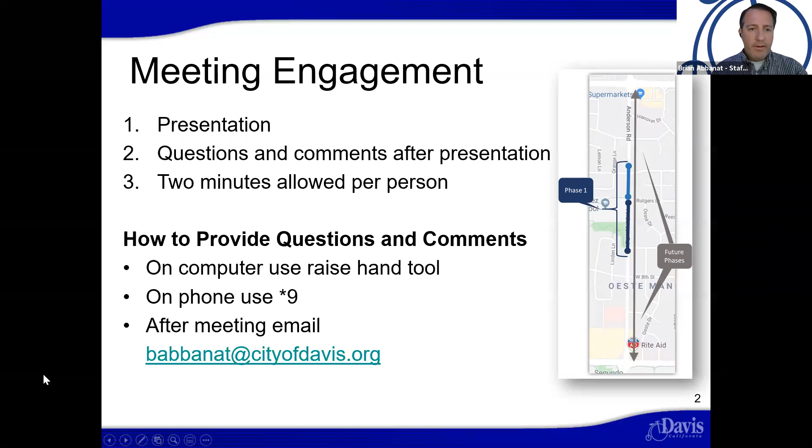Not showing up on my end. Okay, it's advanced, it's just there's a little delay it looks like. There you go, all right.

So Jennifer gave the broad framework for the evening, and I'm going to share with you the actual content of our presentation and how it's organized.

I'll first give an introduction and some background information for those who may not have been able to participate in the first recorded workshop and who might just be learning about this project now.

We will then transition into the feedback we heard from the recorded workshop, and also the survey that accompanied that, and what those survey results were telling us.

Adrian will then share with you the design concept that we're looking toward making on the corridor. After that, we'll move into what the next steps in the process are and what the timing of this project might look like.

And then finally, we will have an opportunity for public comments with questions and answers. So Adrian, next slide.

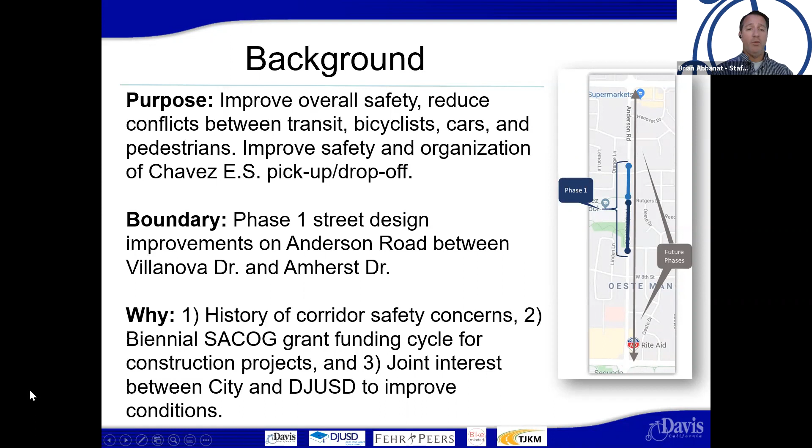The importance of this grant funding is that it leverages $9 in federal funds for every $1 we contribute at the local level. So it really is important to take advantage of these funding sources when we have the opportunity, in projects that can compete well.

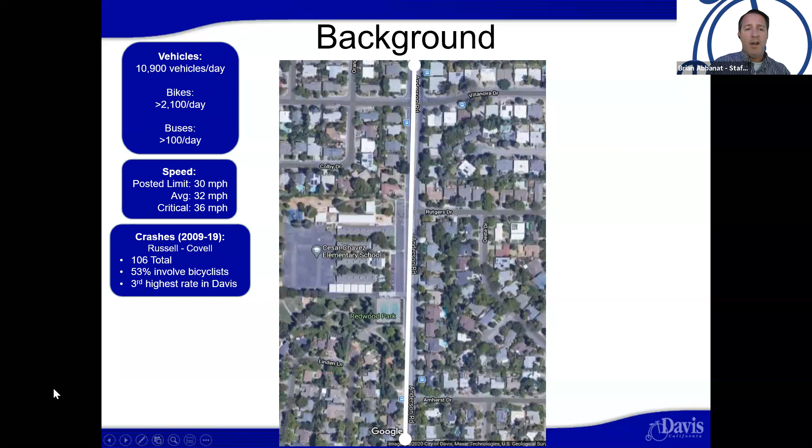We'd like to do that with this project. The 10-year crash history indicates over 100 crashes. Many occur at Covell and Russell, but there's a proportional number of crashes on the interior of Anderson Road as well, between those two intersections. 53% of those crashes involve bicyclists, and this corridor has the third highest rate of collisions in the city. So lots of challenges we're trying to deal with, and hopefully we can make progress with this project.

I was going to look a little closer at the specific project area we're looking at here. There's a hot spot at Villanova Drive where there are quite a few crashes that have occurred, disproportionate to the travel volumes we see on that street or at that intersection. We also have the Rutgers intersection, which is a well-known concern from both Chavez parents and caretakers of their students, as well as neighborhood residents. And the school frontage pickup and drop-off area on the west side is a problem area we want to improve.

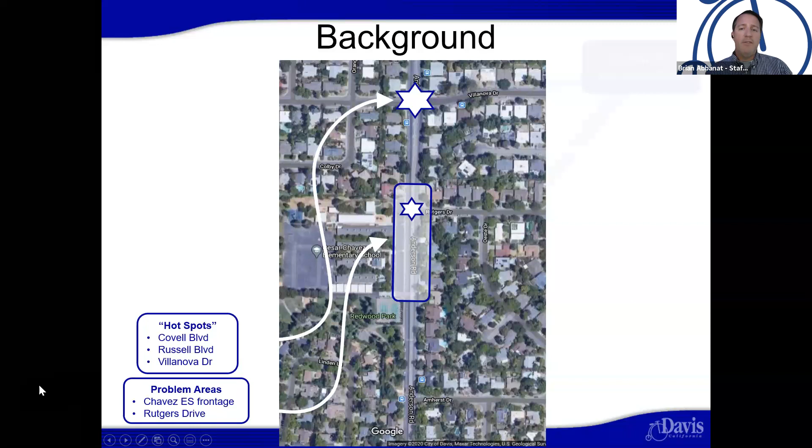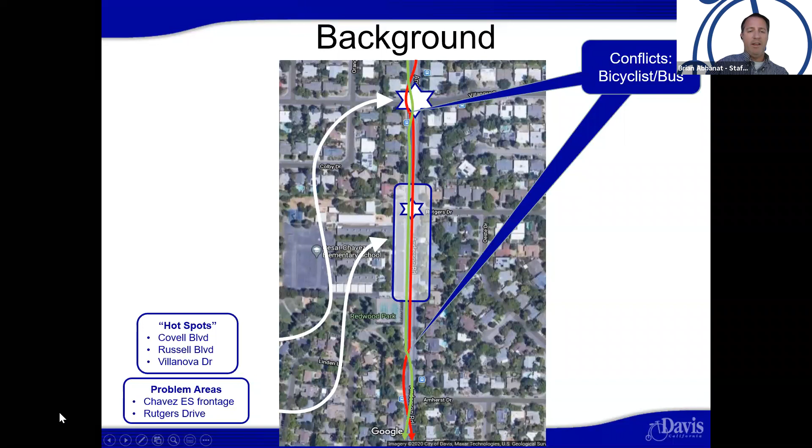Just beyond those hot spots, but also within the project area, we have conflicts between bicycles and buses. The red line represents buses and the green line represents bicyclists. Here we have buses pulling over to pick up or drop off passengers right on the curb in the southbound direction. They have to cross the bike lane to do that, and that occurs again at the southern end of the project area along the entire corridor between Covell and Russell Boulevard. This happens 5 times. Typically, during peak times you have this leapfrogging between bicyclists and buses, and we'd like to better organize that so it's more comfortable for all users, including buses and bicyclists, as well as improving their safety.

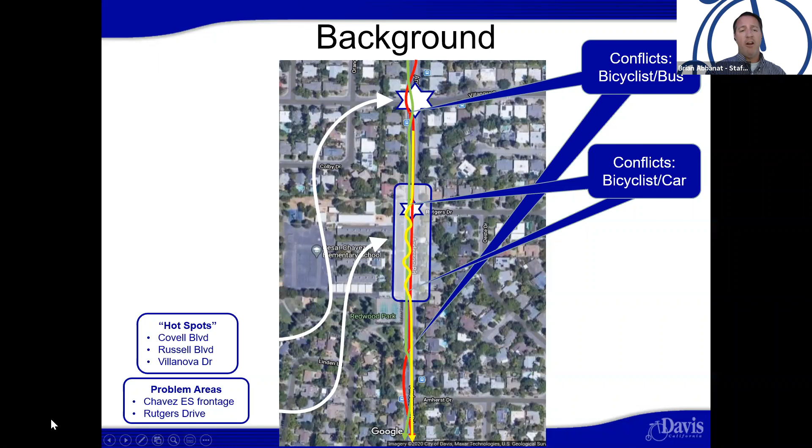And then we have conflicts between cars and bicycles. They're doing the same thing on the frontage of Cesar Chavez, where you have cars pulling in and out and needing to cross over and back from the bike lane in order to do that. These are conflicts that ideally we can correct so the whole project area is better organized and functioning more safely for all users.

Adrian, next slide. Not slide, but just advance.

There are other risk factors that contribute to the complaints and challenges we're seeing on Anderson Road. It's a wide street, travel lanes are wide, and these encourage the higher speeds we referenced earlier that we'd like to see reduced. They also create long crossing distances for pedestrians or bicyclists wanting to cross Anderson Road, which also impacts the amount of red time cars have to wait for people to cross the street. Wide intersection corner turning radii, as they are today, encourage higher vehicle speeds when making right-hand turns into and out of the cross streets. And we know higher speeds are correlated with higher injury and fatality rates - the faster cars are traveling when they collide with a non-vehicular user.

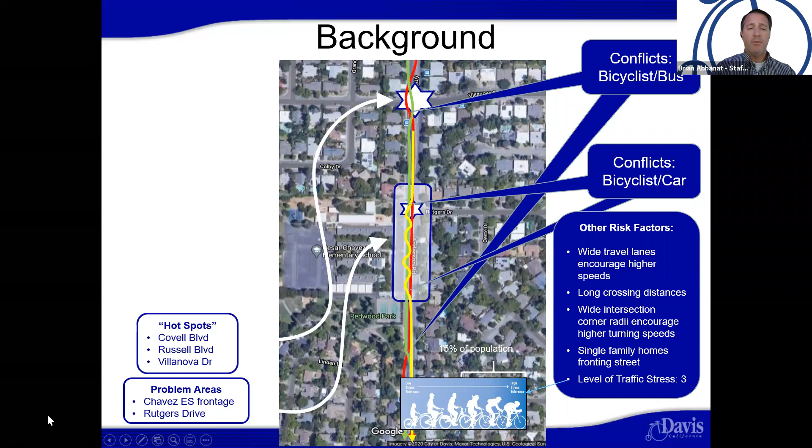I mentioned earlier, single-family homes front the street. They need to be able to pull in and out of their driveway with a level of safety in doing that. There's also a metric for bicycling called level of traffic stress, with 1 being the most comfortable conditions and 4 being the worst, most uncomfortable. Anderson Road is about a level of traffic stress 3, which is only suitable for approximately 15% of the population. We'd really like to make this street more accessible to a broader range of bicycle user types and abilities.

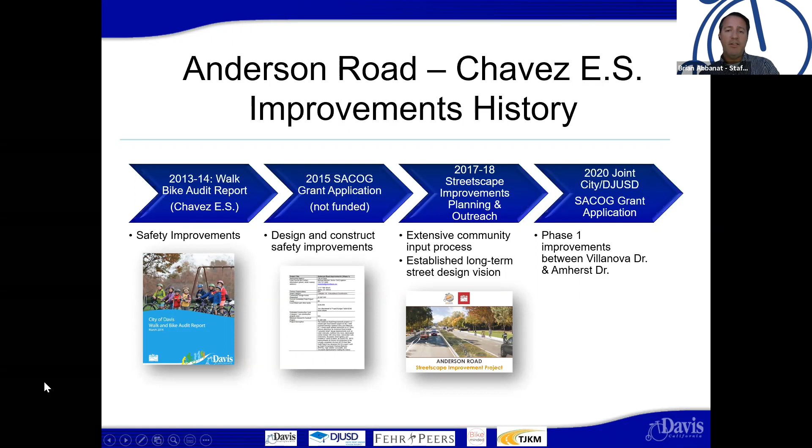There's been a lot of studies and planning efforts for Anderson Road over history. Looking back the last 7 or 8 years, our Safe Routes to School program completed a walk-bike audit report for all of our elementary schools, including Chavez. The output of that study was recommended safety improvements for walking and bicycling to school near Chavez Elementary School. We then took those recommendations and applied for grant funding to design and construct them back in 2015. That project wasn't funded, so we went back to our city council and asked for funding to do a more comprehensive planning and outreach process, which was completed in 2018 and resulted in establishing a long-term street design vision for the corridor. We're building off that vision toward a potential first phase construction project, which is what we're trying to share with you this evening for grant funding. So that's the recent history on Anderson Road from a planning and studying standpoint. Adrian, next slide.

I mentioned at the beginning that we had a recorded workshop back in late July, early August, and a survey. What we heard from the survey results from that first workshop was that about two-thirds of respondents felt it was either very or extremely important to improve safety on Anderson Road, which was a good sign that we'd picked a corridor with a real need. There was also interest in making sure we don't worsen traffic congestion on the street, and to maintain or improve operations along the street. Also, to limit the number of raised buffered islands at intersections to the extent we can, particularly at Rutgers and Villanova Drive. We took that into consideration.

We know that maintaining or expanding school-related parking is an important piece of this project, both to make sure the school isn't negatively impacted by reduced parking supply, and that potential parking impacts don't spill into the adjacent neighborhood. It was important to improve walking and bicycling access to the school to reduce demand for driving. We know some folks whose children attend Chavez don't walk or bike to school because they don't feel comfortable or safe doing that, so we want to improve on that. Finally, over half of respondents shared that they felt the project was headed in the right direction. This is generally a good sign, because with projects like this, we typically get a third who say it's headed in the right direction, a third who say it's not, and a third who aren't sure. So based on that response, we do feel like we're moving in the right direction.

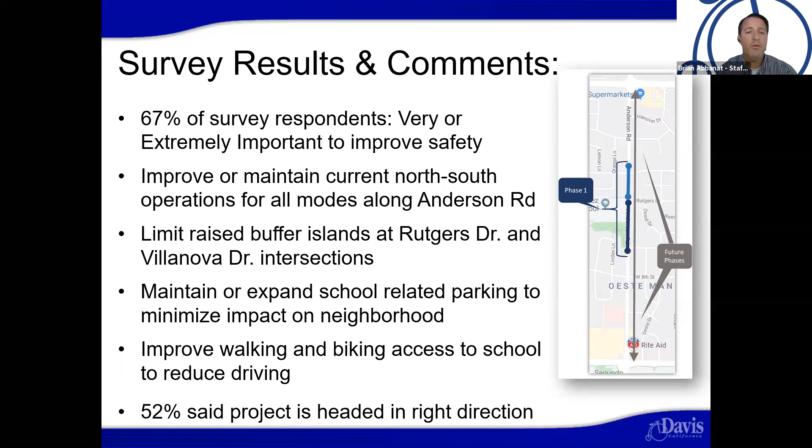Of course, we look to hear from folks on this webinar as well at the conclusion, and solicit your thoughts. So I'm going to turn it over to Adrian, who's going to share some of the design features we're currently exploring, to help you better understand and visualize what that looks like and how they can affect traffic circulation as well. So Adrian, go ahead. Great, thanks, Brian.

What we've completed is a very high-level conceptual design of the improvements along Anderson Road, basically from just north of Villanova Drive to the south end of the school and the park. With this, we're showing new lane configurations and some intersection modifications, but really at a conceptual planning level. There will be design details worked out when the final design happens, so take that to heart as we look at some of these details.

A few points first on the north end of the project. It's consistent with both designs, concept 1 and 2. There are three main things we've been trying to accomplish with these improvements at the north end. The first is that currently Anderson Road drops from 4 lanes down to 2 just south of Villanova Drive today.

There's a lot of merge and issues just north of the school frontage, which we think contributes to some of the collision history we see at Villanova Drive. So as part of the project, we're proposing to move the existing lane merge that happens just south of Villanova to just south of Radcliffe to the north, lengthening that distance so the lane merge happens further away from the school and simplifying the intersection quite a bit.

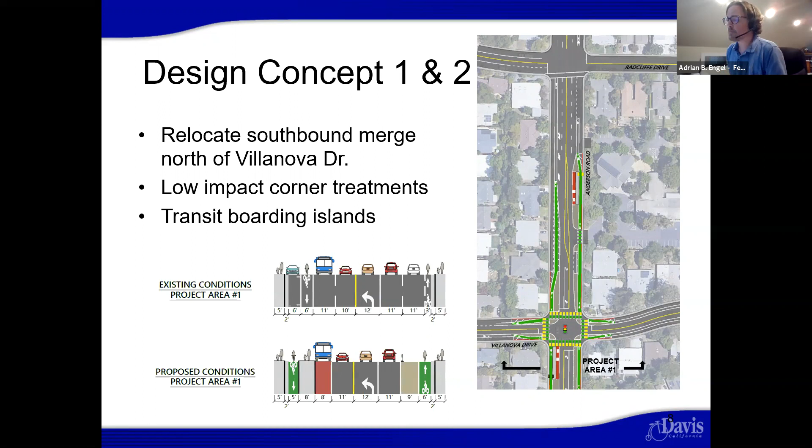As we move further south along the corridor, the two concepts diverge, and we have two different options we're presenting at the meeting tonight. The first option, concept number one, looks at maintaining the current operations for school pickup and drop off, utilizing the western curb on Anderson Road.

The difference here is we're proposing to create a separated bikeway, a class 4 facility that moves the bikeway closer to the curb instead of the typical class 2 bike lane floating between the parking and the traveled way. This removes a lot of the conflicts where cars are pulling in and out of that loading zone and conflicting with bicycles today. I have some videos of operations analysis we've done that highlight that conflict.

With this option, there is a remaining conflict that is not mitigated: as kids and parents get out of cars to reach the school frontage, they have to walk across the bikeway, so there is some caution needed there. Everybody needs to have their heads up, and bikes need to be cognizant of the presence of pedestrians in that location.

In addition to the separated bikeway and loading zone treatments, we're also proposing improvements at the Rutgers Drive intersection, with enhanced crossing and a pedestrian refuge to significantly shorten the crossing on the north side of Rutgers, as well as corner radius reductions and potential bulb outs that will help slow turning vehicles on and off Rutgers Drive at this location.

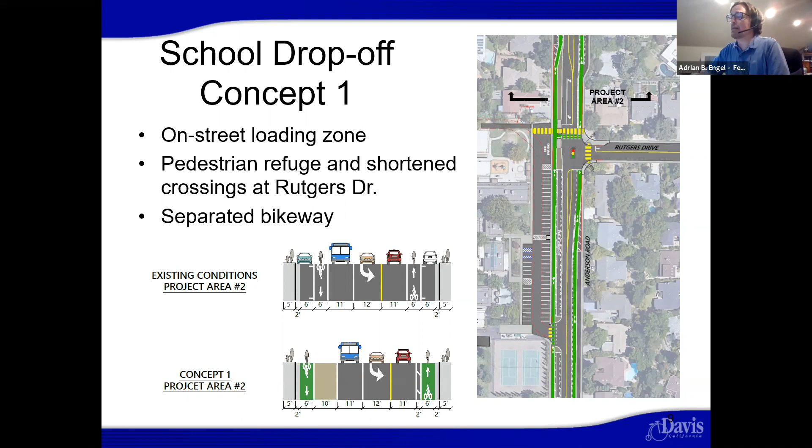At the same location, we've created additional cross sections showing the dimensions of both the traveled lanes and the bikeways. A couple things I'd like to highlight: on the southbound direction, that loading zone has buffers between the bikeway and the parked cars, so there's a door zone for kids and parents opening car doors toward the bikeway.

But we also thought it was important to have that same door zone buffer on the travel side as well, to allow parents or kids to get out on the driver's side just as safely, without worrying about the traffic moving by at that location.

So definitely widening that space, making it easier for people to get in and out of their cars safely. And then also, you'll notice that on the northbound direction, the parking is remaining against the curb in this location, and we're maintaining class 2 bike lanes with a small buffer on the travel side as we can. And this is really to try to preserve as much as possible of the on-street parking where there are existing residents along the corridor. So trying to allow homeowners and guests of those homes to be able to park in front of those homes up against the curb still, with those bike lanes being more traditional, even though we are keeping the width per Davis standards and including a buffer where possible.

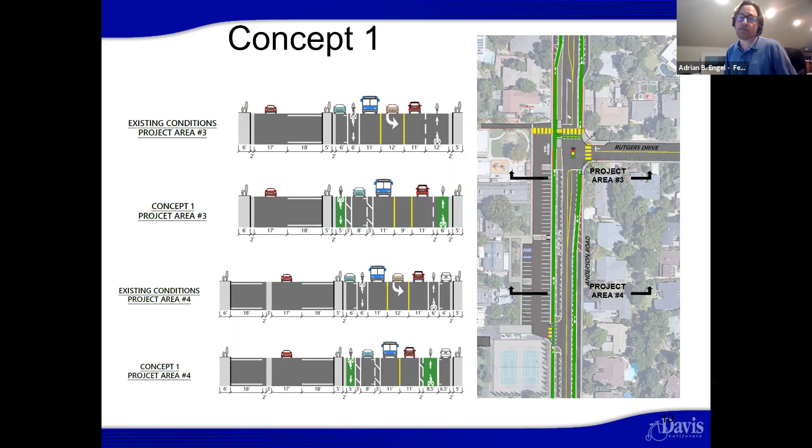The second concept varies the drop-off location significantly from concept number 1. In concept number 2, we're actually creating the pickup drop-off zone on the school campus away from Anderson Road itself. To be able to accomplish that, there's a few things that we've done. First, we've opened up a new west leg of the Rutgers Drive intersection. At that signal now, you'll be able to enter the Chavez School parking lot. The parking lot operations would be southbound only. There'd be staff parking along the curb, along the sidewalk of Anderson, and then the drop-off zone would be right up against the school frontage on the west side of that parking lot area.

And then all of the vehicles would exit the parking lot at the southern driveway to be able to get back onto Anderson Road. The idea is to try to maintain that one-way operation to increase efficiency and make it very easy and safe for the kids to get dropped off at school without impacting a lot of the traffic and bikeway conditions that we see today. With this option, we have maintained the separated bikeway along the school frontage. There would be some sort of neighborhood permit system for staff and teacher parking along this frontage as well, but it would create that protected bikeway along the school frontage with the parked cars there. And in the northbound direction, similar treatments that we saw from concept number 1 with the class 2 buffered bike lane and the on-street parking up against the curb.

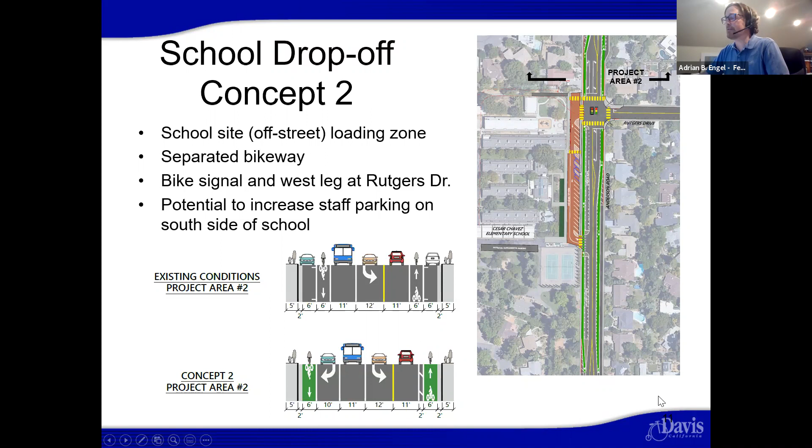Again, here are some cross sections for the area just south of Rutgers. Some highlights for this, you'll notice that there's angled parking within the school frontage area. Again, this is to help maintain the southbound orientation for the parking lot. And you'll also notice that the travel side buffer for the on-street parking along the frontage of the school has gone away as well for a portion of this area, and that's to accommodate that northbound left turn pocket. So slightly different than concept number one there as well.

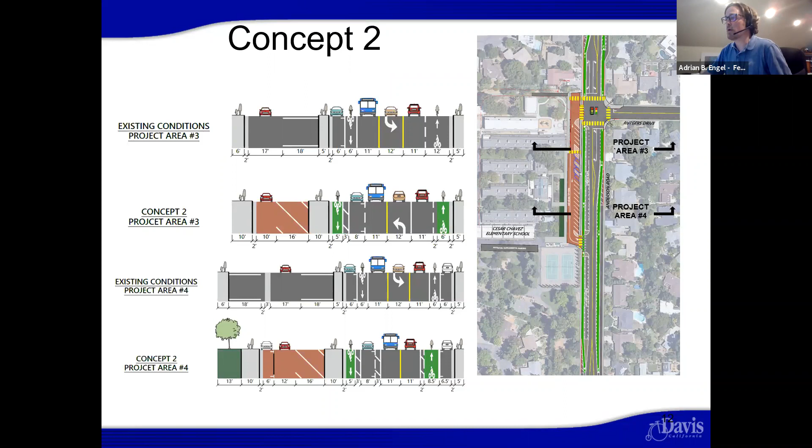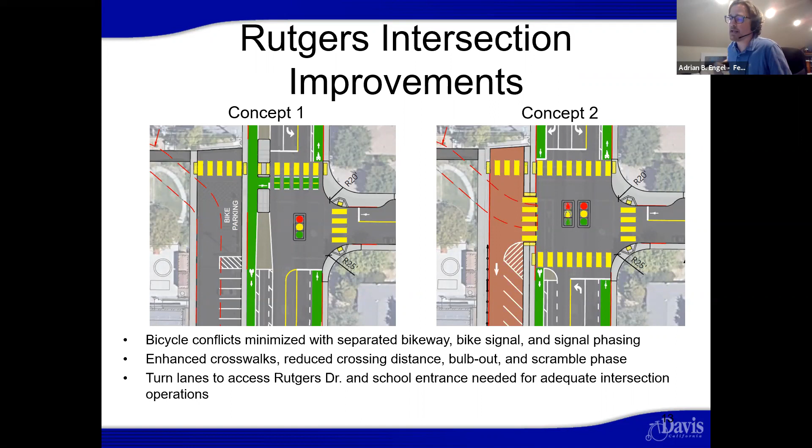I've already talked through both of the intersections individually, but here they are side by side for concept number one and concept number two. You can see how concept number one shortens the crossing distance for the north leg of the intersection for both bicycles and pedestrians to be able to get across Anderson more quickly and safely. And then concept number two, highlighting that bicycle signal and some of the other turn lane features that will help get the bikes and cars in and out of the campus efficiently and safely as well.

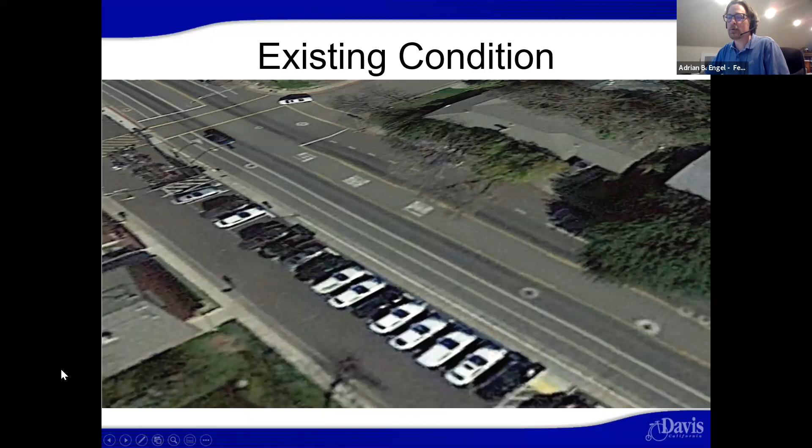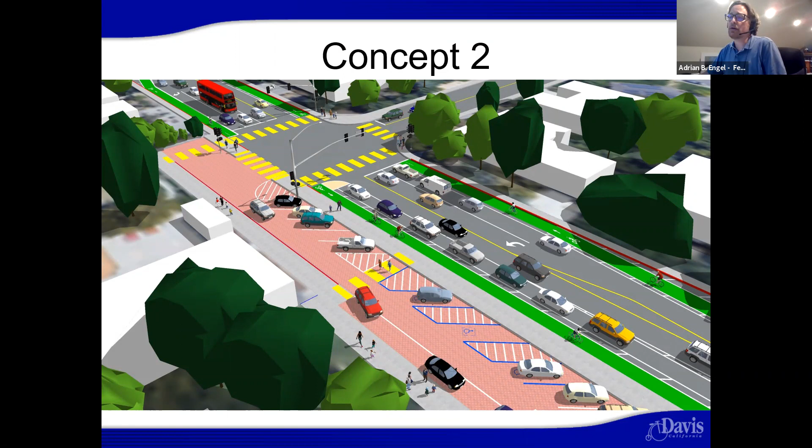Concept number two, same vantage point. Again, the separated bikeway between the curb and the staff parking on street, as well as the diagonal parking within the school frontage and the pickup drop-off zone happening at the very bottom of the screen, where the red and black car are, to show where kids are getting in and out to access the school more effectively. In this location too, you can also see the expanded Rutgers intersection that shows that west leg access point into the parking lot.

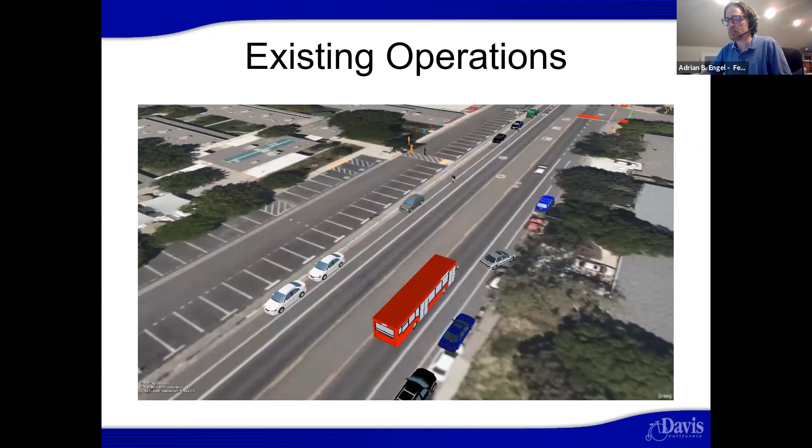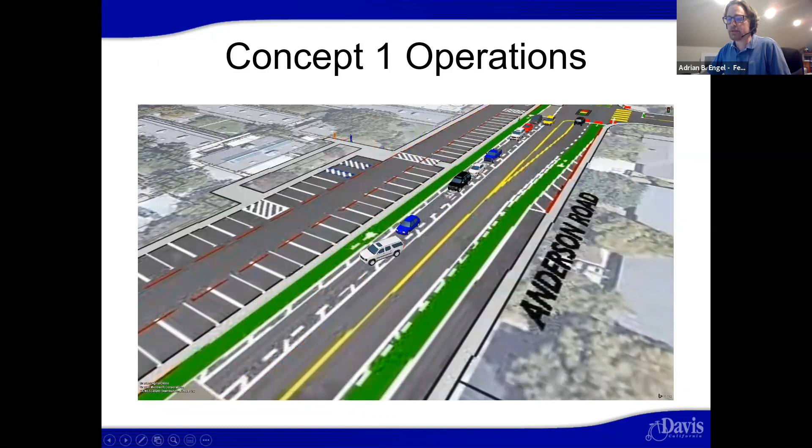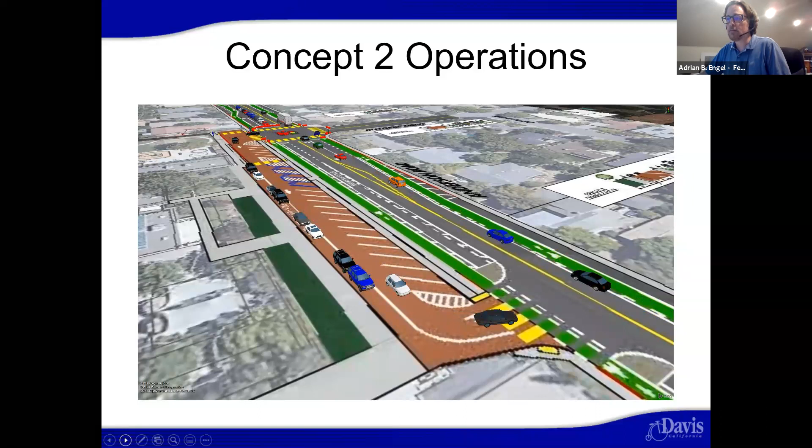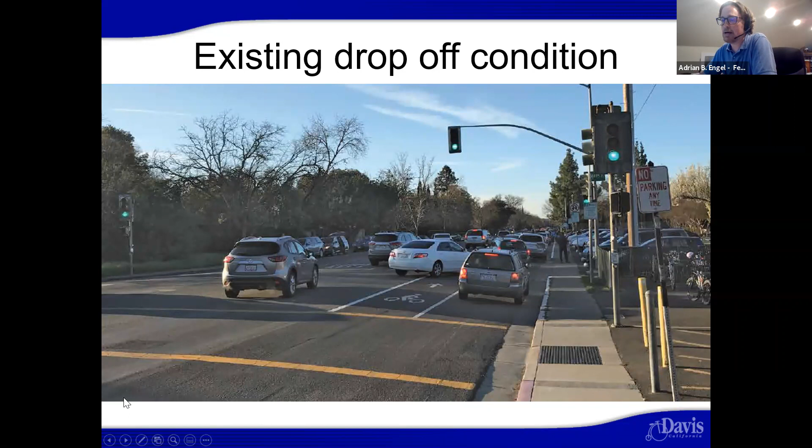We also looked at some other visualizations from the vantage point of the user along the corridor. This was a typical sort of pre-COVID condition during the drop-off time in the morning. And you can see the cars trying to pull in and out of the parking lot or in and out of the parking along the curb face, blocking the bikeway with the other southbound vehicles having to go around those cars pulling in and out to be able to get further south on Anderson.

And then with concept number 2, showing the new driveway into the César Chávez Elementary parking lot to the north end, and really a reduction in the amount of conflicts during the pickup and drop-off time, because all of the staff parking will already be loaded before that hour happens, as staff gets to the school before the kids do, and then all of that pickup drop-off happening on campus away from the southbound vehicles.

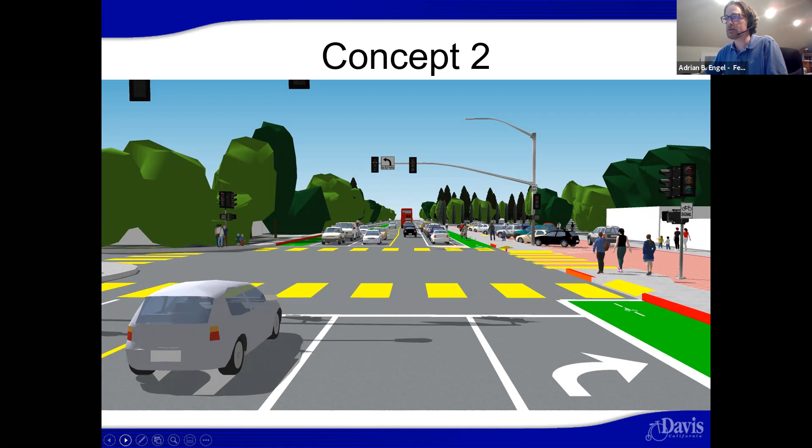And then finally, we have 2 intersection animations that show some of the operational benefits. And you'll see here the southbound right turn pocket was able to happen when the bicyclists had a red light in the southbound direction. Scramble phase for pedestrians to be able to get across. And then you'll see here in just a minute that the southbound bikes and the southbound cars will go at the same time, holding those right turning southbound cars to keep those 2 movements isolated from each other to make it safer.

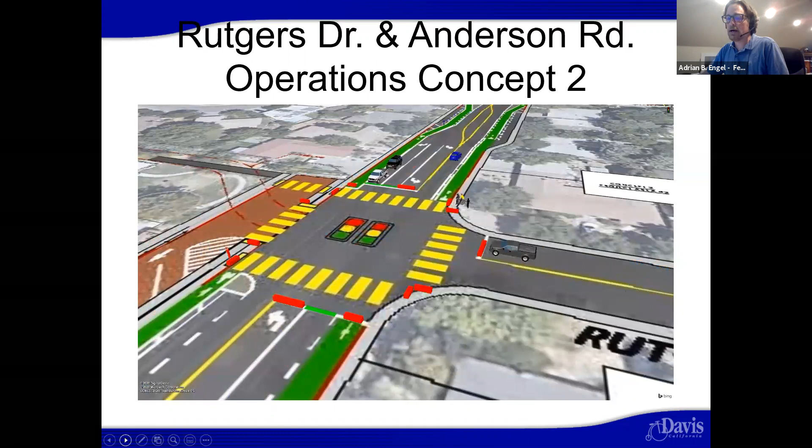And then finally, we ran a simulation at Villanova Drive and Anderson Road as well, showing how the operations would happen with a tighter intersection at this location, with the lane merge moved further north. What we've noticed is there's not an appreciable difference in the operations and delay with this concept. There's a little bit more queuing than happens today, but it's appreciably the same, but you do get the benefits of having some separated bikeway facilities as well as those bus boarding islands that will help keep separate movements for the buses and the bikes going in both directions.

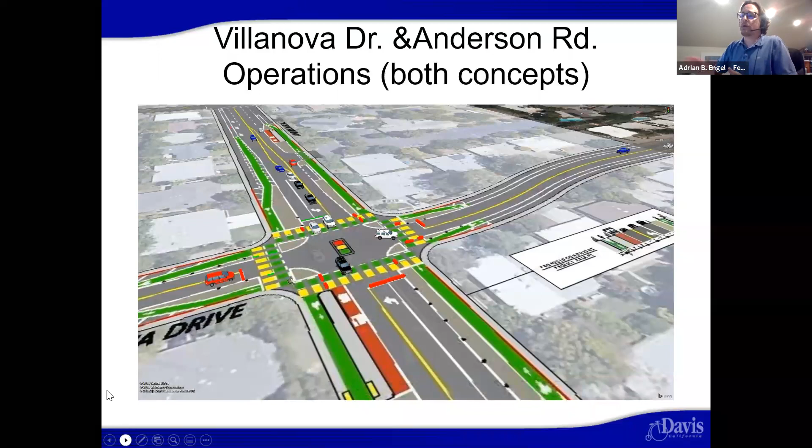And so with that, I'm going to hand it back over to Brian, who's going to talk a little bit about some of the outreach to date. Yeah, thanks, Adrian. I appreciate you going through those design concepts and the simulations. I think that's helpful so that folks can really visualize exactly what the potential effects would be from these design changes. I just wanted to switch gears a little bit to share with folks what some of the outreach has been to date on this project, as well as what's coming up.

So back prior to 2020, I had mentioned the Walk Bike Audit Report study, the SACOG grant application and outreach that occurred with that. And we went through a 6 to 9 month planning and outreach process for the corridor. Back in July and August, we had a recorded workshop and survey, like I mentioned earlier.

In September, just a week or so ago, we did bring the project to the Recreation and Park Commission, because concept 2 that Adrian was showing you does result in a reduction in parking in the parking lot for the faculty and staff, which is not fully recovered with the dedicated on-street parking for them. So what we were proposing to do is to recover some of that parking in Redwood Park immediately adjacent to the south driveway on the Chavez campus. And by doing that, we would be able to recover all of the parking that would be otherwise lost to concept number 2. And then, of course, today we have the live workshop that we're presenting.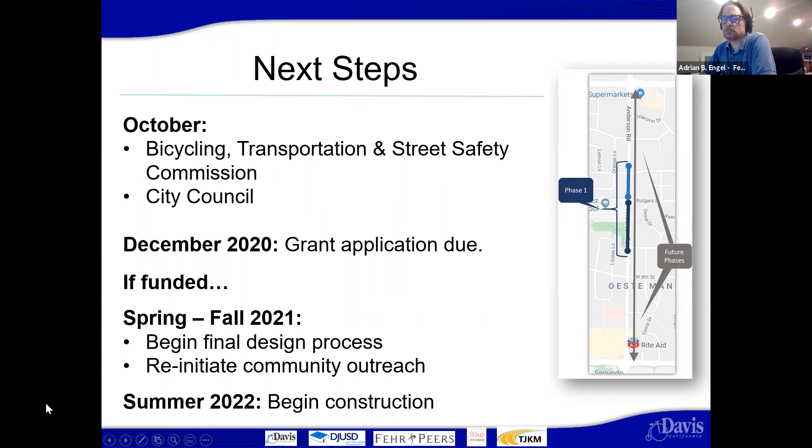Now, if this project is awarded funding, we likely would begin final engineering and design for this project in late spring, summer, fall. Kind of depends on how things materialize. There will be another series of community outreach as we get closer to a final design, and also diving into some more of the specifics, which we have not attempted to do at this stage, because we're really trying to address some of the key assumptions and key design features for the project. In either circumstance, we probably would not begin construction before summer of 22, just the way that the timing of these things works out in avoiding construction during the school year.

Next up. I'm sorry, next slide.